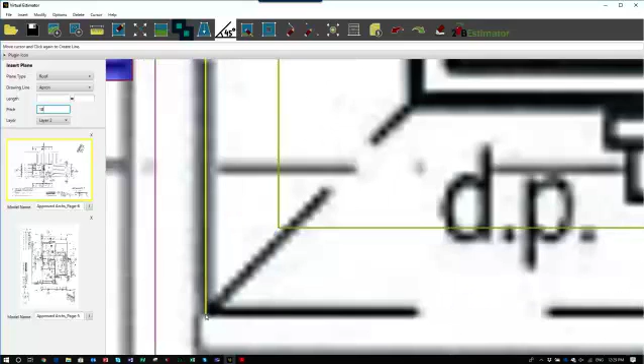And that's an apron, isn't it? I should have changed the line type. Oops, 18, and change that to a hip.

And there's our first plane at 18 degrees. I'm just going to change that line to an eave.

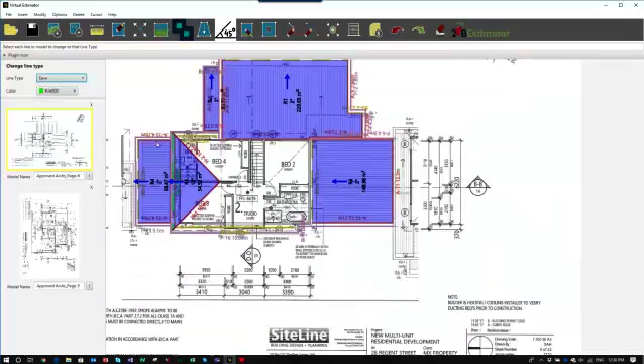And we're back on track. So we'll start with the next one. Just remember to change this default 1 to 18. And we've got an eave. Eave, and I'll just get rid of that E. That is something we're trying to get rid of. Just need to be careful. Need to zoom in to get rid of that.

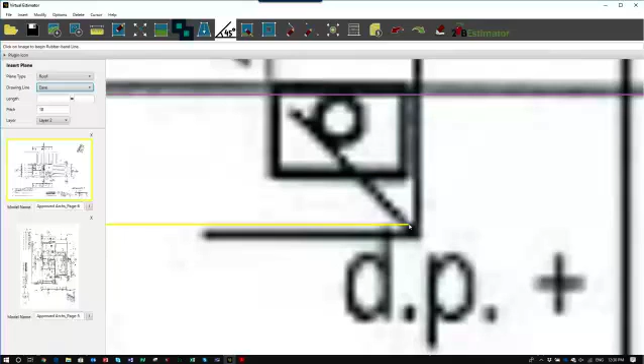You can see that this image is a little bit skewed, and I've also forgotten to change the line type there, so I'll do that again.

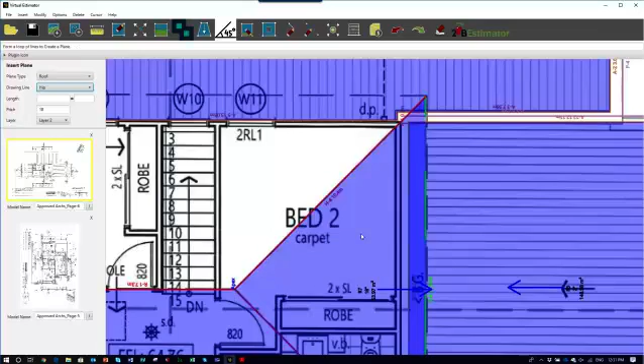Back to hip, and back here again, 18 degrees, eave, hip, and then finish off with an eave. So there's our top roof.

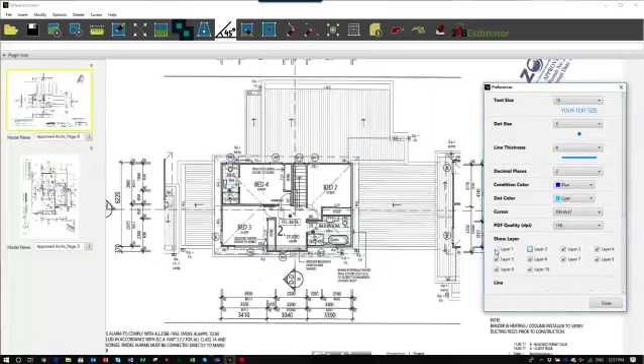Now, interestingly enough, if you wanted to see, if we go to preferences, we can turn off layer 1, or we can turn off layer 2 and leave layer 1 on. So you can utilize that function when you're drawing so that it helps.

When you're bringing in a PDF, you can have it at 300 dpi, and sometimes that, if the file is very big, it will not come in, and you can try lots of times. So that's why we've got the different qualities of DPI. So I set mine at 150.

It still gives us a good resolution. You can change the dot color to whatever. If you have any problems with colors, like being colorblind or something, you can change the colors of these things to suit. You can change your text size to whatever suits you, the dot size as well, the line thickness, and how many decimal places. If you're in meters, 2 decimal places is good. If you're in millimeters, then you really want that to be 0.

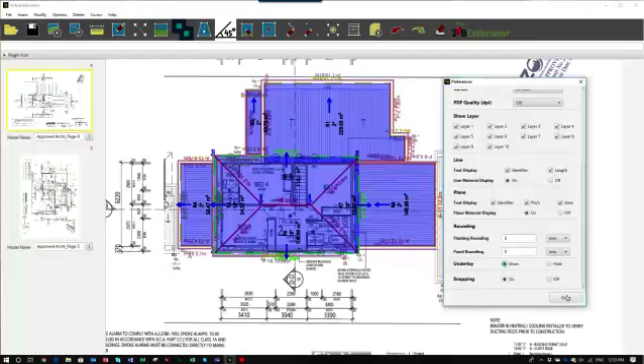You can muck around with the different line texts if things get in the road, and rounding and panel rounding, and you can hide the underlay and show the underlay, and don't worry about turning snapping on and off at this point. Okay, so that's how we would do that.

There's one other thing though that I'm not sure we've shown you, and that is move point. So if you feel like you've made some type of small error, and in my mind this is okay even with this skew, but if for instance you wanted to move a point, you click on the point and then you can move that point to wherever you need to.

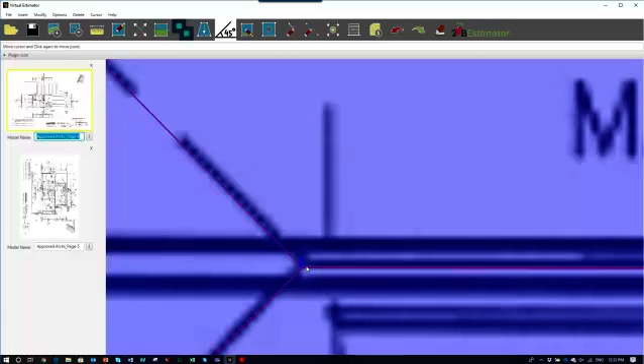Now it should snap back to what is square, and you can see the different lines are showing up. So this should be 53.97 and 55. It should be pretty close. 108.4, 109.54.

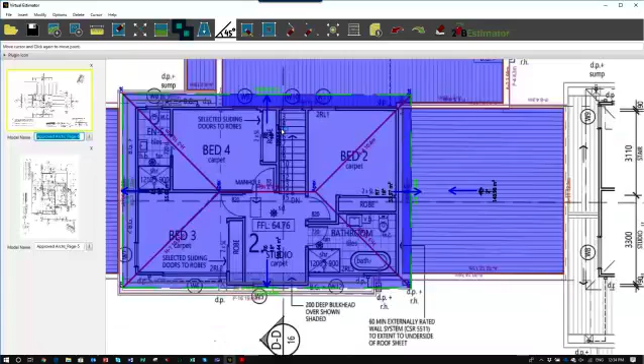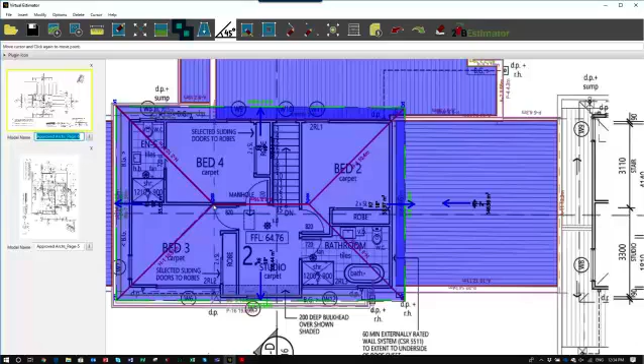So I might have not put it back in the right spot. That green line there, a red line on the top and that green line there. Helps me show that it's square. Well, that's pretty close.

Okay, so there's one example. The other thing I wanted to talk about was point items. So we've got one point item of whirlybird loaded in there.

Now I actually want to insert some more, so I'll go to create and I'm going to put in sump, and we'll make that green, and we're going to make the size 300 and add, whoops, I need to put in an S, and add, yep.

We'll go to this again and we'll put in rain head, RH, we'll make it orange and also 300, and let's choose one for that. Just a square would be good.

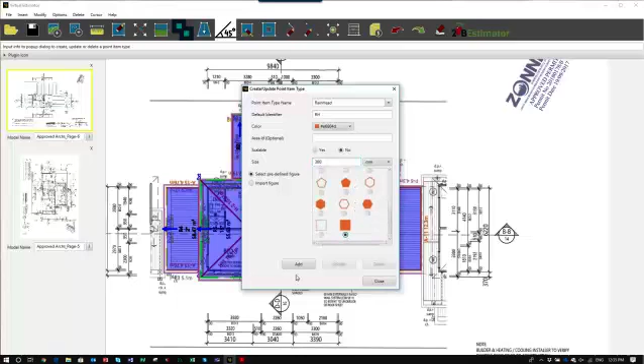This one here, and we'll add that. So now when we look around this, we've got rain heads and sumps. So I'm going to add the sumps.

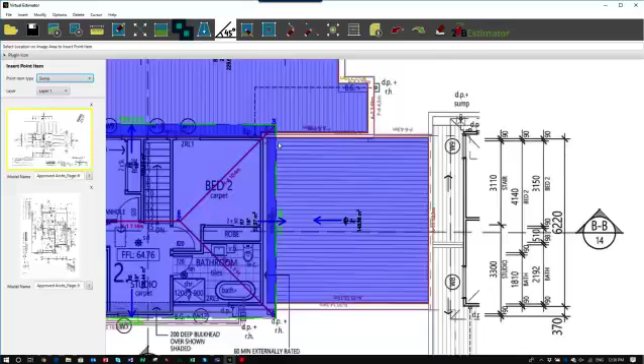So I click on that, there's a sump. Let's look for some more sumps. It's a rain head, there's a sump. The rest have rain heads, I think.

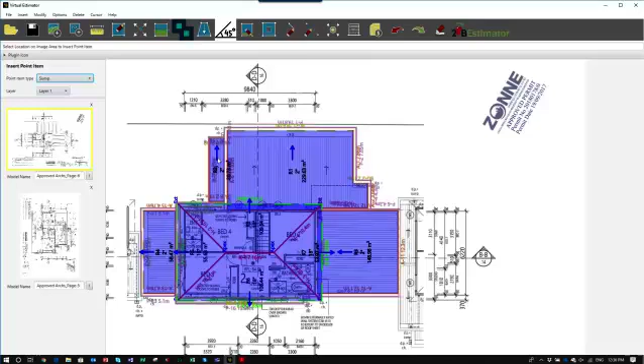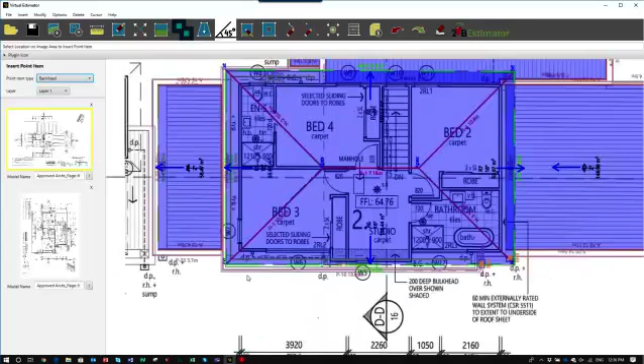Okay, so we'll change this to rain head, and we'll put rain head there, rain head there, one here, one here, and one over here, and that one's a sump.

So when we look at our tally quantities, it tells us we have 2 sumps, 5 rain heads, and all of the rest of the stuff. So then we would save this, and I actually want to save this as what that job is.

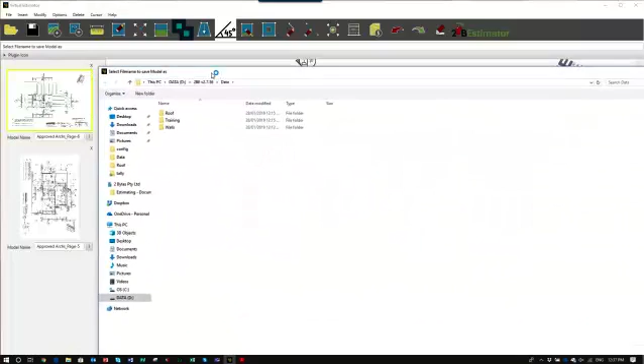So that was page 6. If we look back at our opened on another screen, so this is 28 Regent Street, Camberwell, and let me see which, I think it's unit 2. And yes, it's unit 2.

So what we want to save this as is unit 2 and then a hyphen or underscore, 28 Regent Street, and save.

Okay, I hope that gives you some more to think about and work with, and I'll do the walls video next.